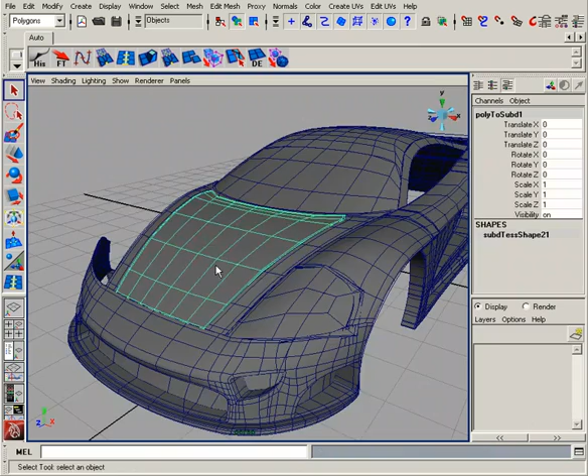In this lesson, we'll add a scoop into the main geometry of our hood. This is the piece of the hood that we're worried about right now. We want to basically add this little scoop in here. You can see it on the front view as well, kind of punched right into the top of this hood.

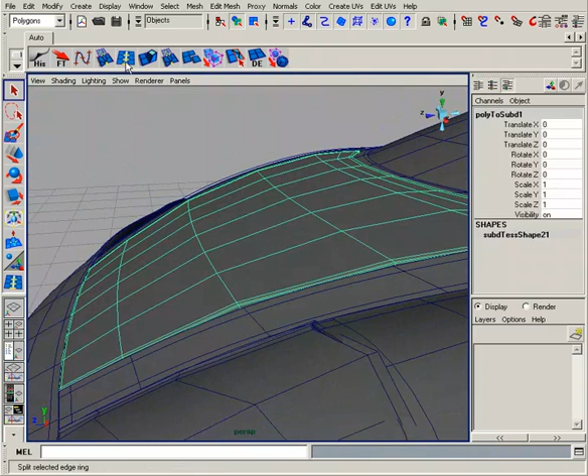So one of the first things we want to do is start to draw this out to match this scoop, much like we did with some of the back pieces. But looking at this, it looks like it's going to be a little bit too low res, and it might give us some problems once we start adding that hood into there. So I'm just going to add a couple of lines of resolution here, right along the side.

And as I do that, I'm just going to translate those up slightly so that we maintain that curvature. Let's go ahead and add one right down here, and just a little bit. I'm going to go ahead and actually select this middle one, go into wireframe here, select this middle edge, and just move it down just a little bit.

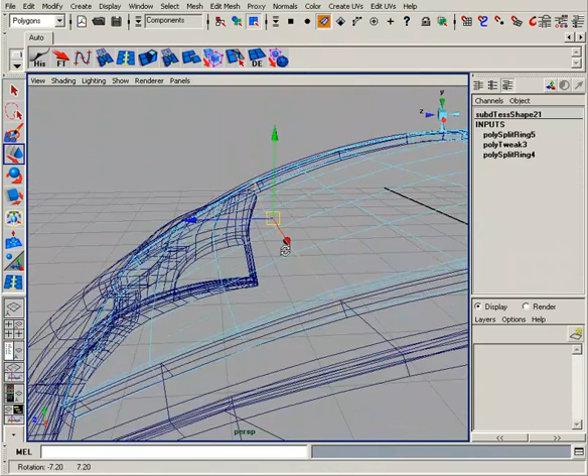I'm just maintaining that curvature, because now the subdivision, when it does it, it has a few more edges, so it doesn't need them to be exactly there. It needs them to be a little bit closer to the way that the subdivision surface is. So now we can go in and start redrawing this a little bit.

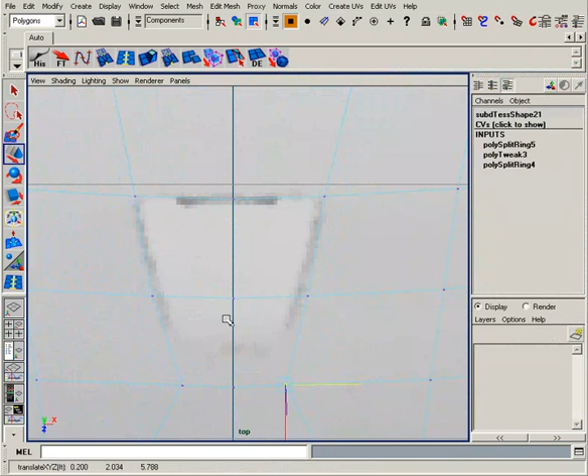So I'm going to go ahead and select this point right here, and start moving these along the normals there, right into the corners, and pull these up into position. A scoop doesn't have to match perfectly. This is actually kind of smoothed out into the hood, so it can be a little bit longer. I'm going to just go with that at this point.

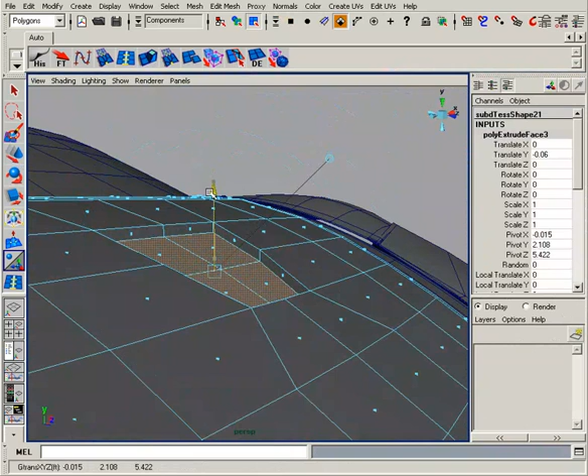I will straighten this up just a little bit, and then I'm going to go ahead and grab those faces, and then extrude those in. Let's go ahead and extrude down, straight down. And then what I want to do is rotate that.

Okay, and move it back just a little bit, and I'll move it up just to get that. This piece is going to be a little bit more horizontal here. And let's scale it in just slightly.

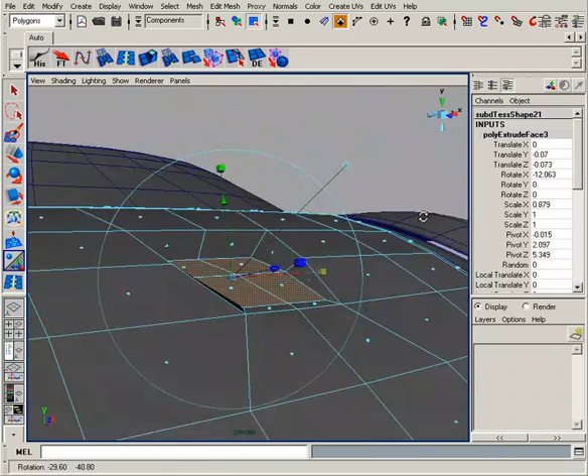Alright, and now we can go ahead, I'm just going to add an edge right along the top here. And I don't think I want this quite so tapered in. I'm going to go ahead and scale this out just a little bit.

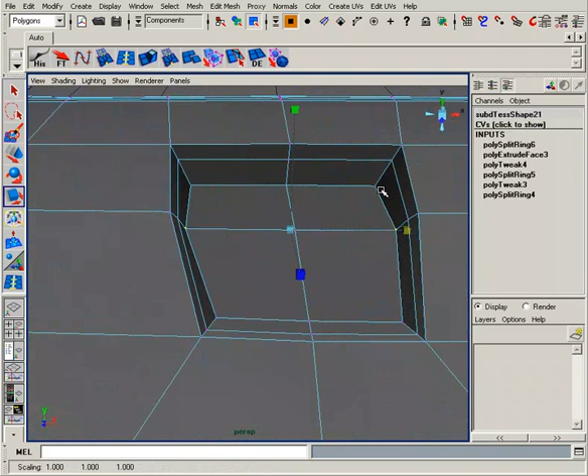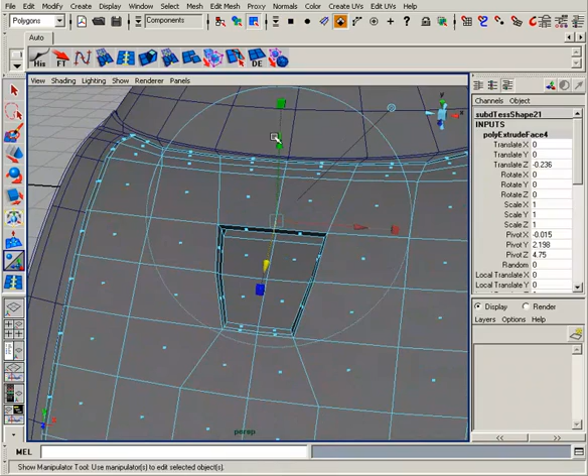Right along here. And then I want this to kind of look like it goes back into the hood, so I'm going to go ahead and extrude these, and just go straight back in there, just like that. Alright, so we've got the main geometry of this scoop figured out.

Now we need to go in and start adding the resolution here that's going to hold these edges. One way to do it, we've done it before, would be to go ahead and just add an edge where you want it, and then go in and space those out using our move along normals.

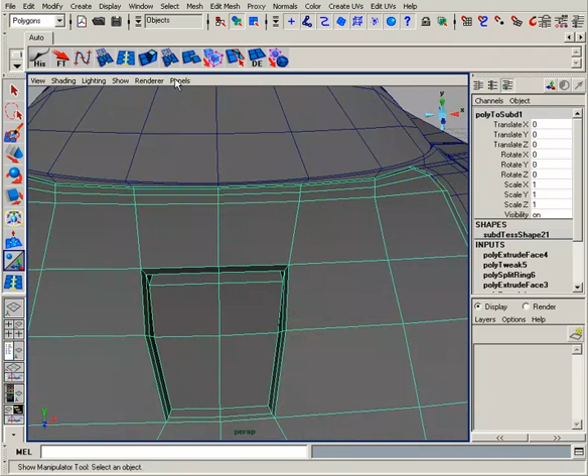Another way would be to go in here, and let me just delete this half. We're only going to be working on one half, so let's go ahead and delete that half, and I'm just pulling an edge right in there. This is going to work for us down here and down here, but inside here, it's not quite as close as we want it to be.

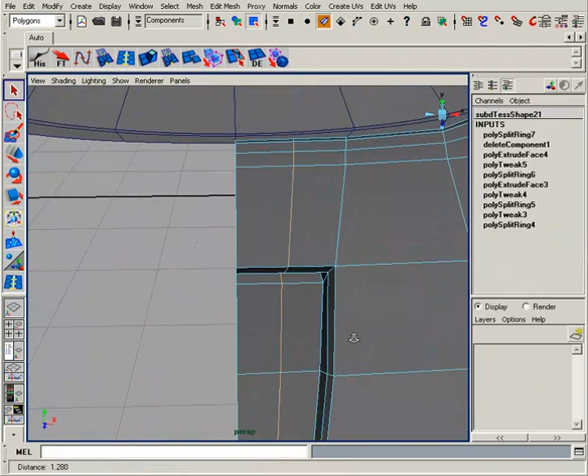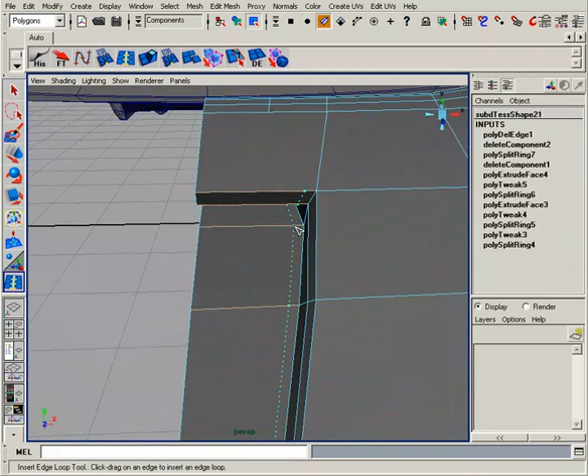So if I just delete these edges, and then all I want to do is delete all these edges on the inside here that I just created. Now I'm going to place this edge exactly where I want it, maybe right about there. And then I'll go ahead and connect those up, connect that up right there.

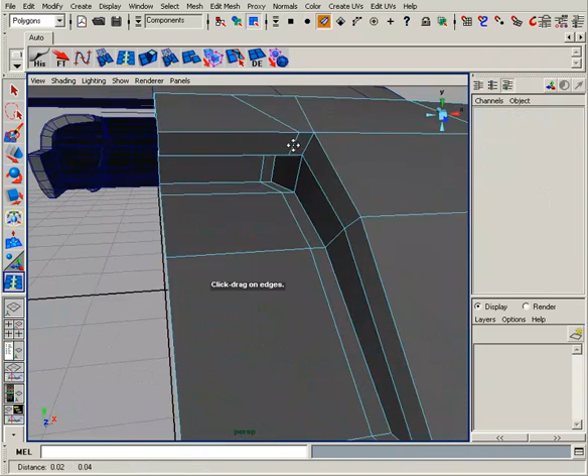Might need to space these out a little bit because we're going to have a few more edges coming along here, so we need some room for those. I'll space those out, and then I'm just going to put an edge right up here to kind of hold that sharpness of that edge. Again, we'll come in and space those out just a little bit, keep spacing that out so that we don't get anything too jumbled down there.

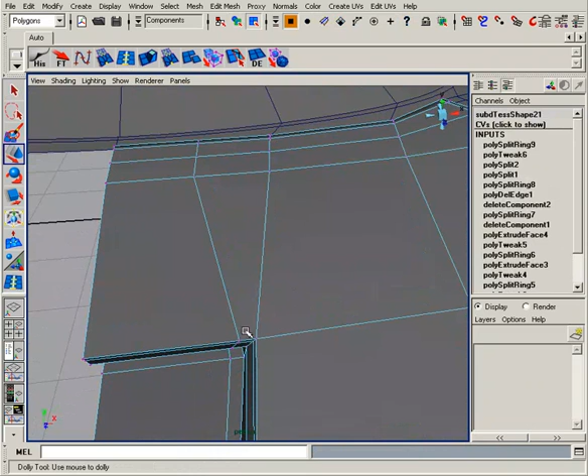And now we just need some edges right along here to hold this sharpness of this edge, and right along the side. So let's go ahead and do the same thing up here. I'm going to add an edge right in there, and again I'm just going to translate that up just a little bit to maintain that curve.

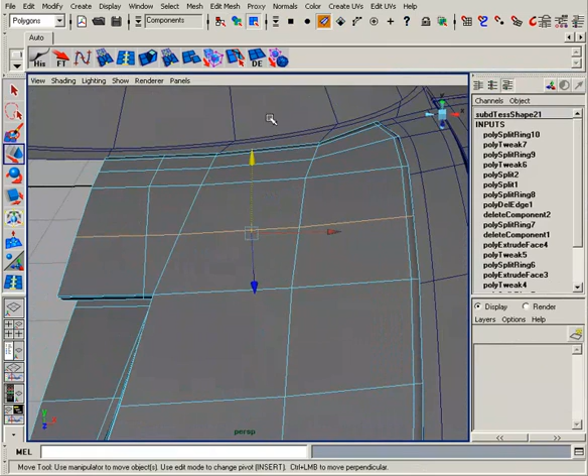Okay, and then we'll actually go in and redraw that a little bit. I want it to come right up next to this guy. And then I can just delete those.

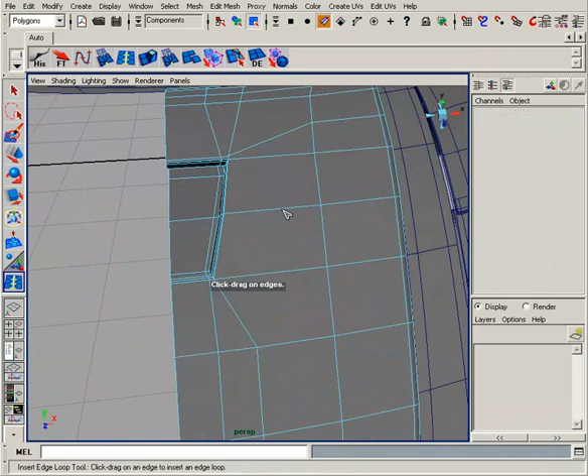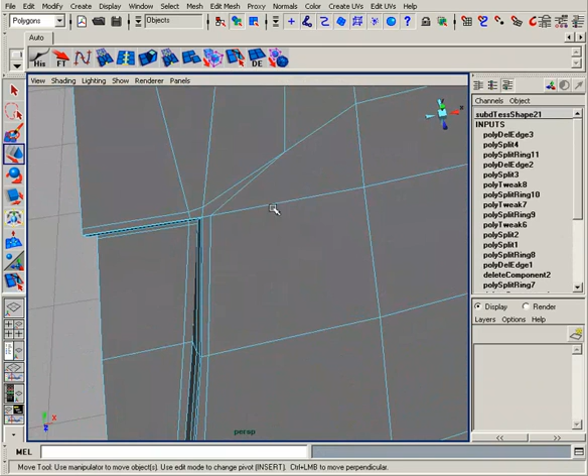And then we need one right along the side here. So I'm going to go ahead and add an edge right along here, and then I'll just redraw that. Let's start it right up here, bring it in, and then bring it right back out again. Yeah, we could go ahead and space this guy out a little bit.

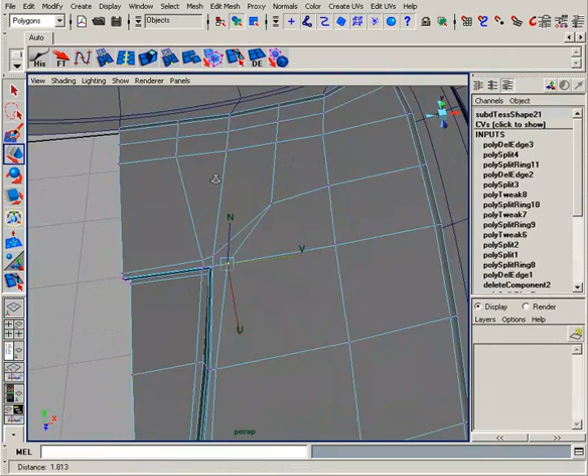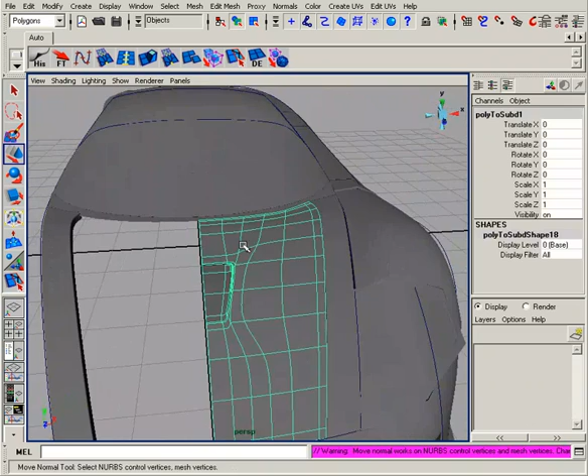Just like that. Let's go ahead and check that, delete that history, subdivide it and see what that looks like. So it actually looks pretty good. We're getting a nice cut into our hood there with a pretty sharp curve, and it's kind of sloped down into there. Let's go ahead and just convert that back and do a quick mirror.

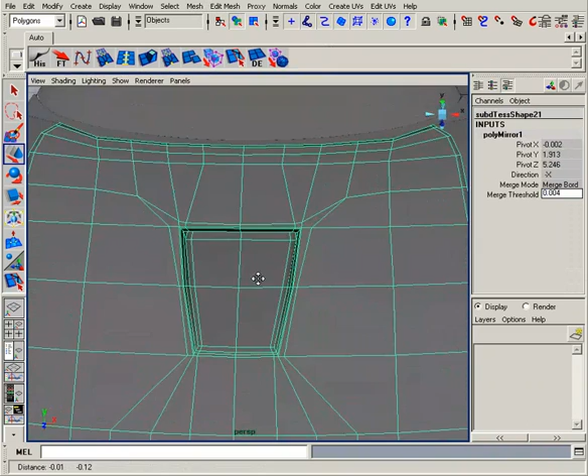And it looks like our points are a little bit off, so I'm going to change that threshold down to something—actually, we want it to be a little bit higher. 0.004 looks like it's taking care of us. Let's go ahead and delete our history, and let's check that over again.

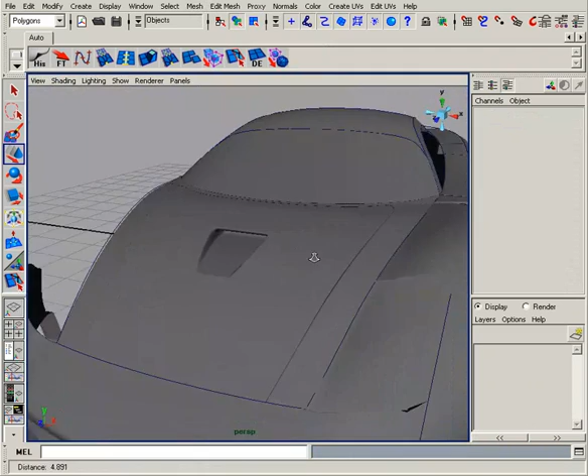Okay, so we've created a nice scoop, and by spacing those lines out, we were able to avoid any of the creases from having such a sharp cut into our curved surface. In the next lesson, we're actually going to go in and start working on the geometry for the trunk.